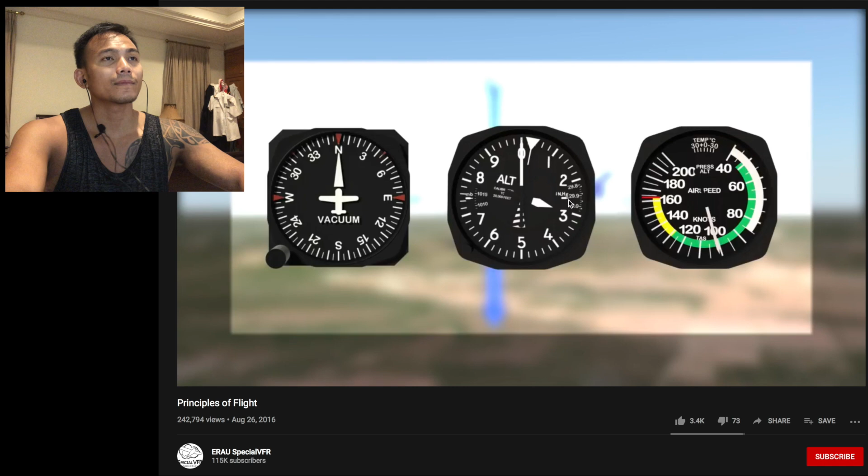When an aircraft is maintaining its heading, altitude, and airspeed, it is said to be in straight and level, unaccelerated flight. Jadi kalau dia maintain ini semua, berarti pesawat tegak lurus ya, straight and level. Terus dia nggak ada akselerasinya, penerbangannya nggak ada akselerasi, jadi dia konstan aja. Dia nggak ada climbing, nggak ada descent. Di 3000 feet di sini headingnya to the north, speednya konstan 100 knots.

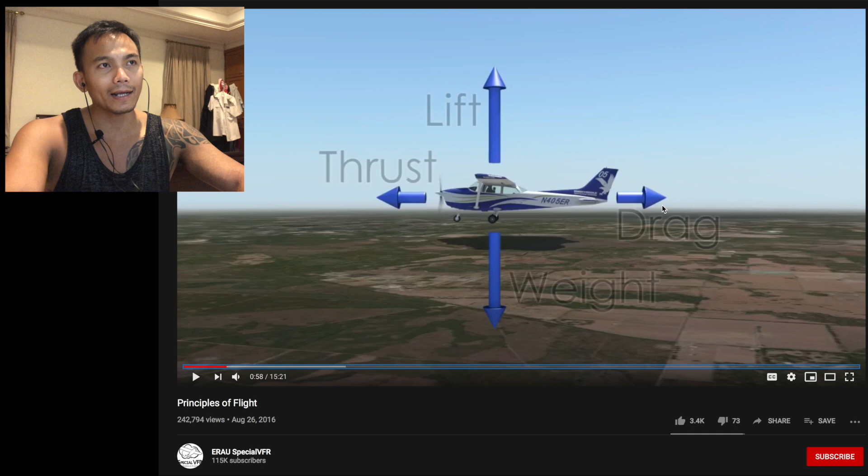In unaccelerated flight, lift equals weight and thrust equals drag. Jadi kalau unaccelerated flight, pesawatnya nggak akselerasi, lift sama dengan weight, thrust sama dengan drag ya. Let's look at these four forces in a little more detail. Nah sekarang bakal dibahas 4 force itu lebih detail.

The key to an aircraft being able to fly is lift. Jadi yang membuat pesawat bisa terbang itu namanya lift ya.

Looking at a cross-section of a wing, we can better understand how the lift gets generated. Nah ini sayap nih, bentuk pesawat sayap kalau dilihat dari samping. Nah sekarang mau dibahas kenapa bisa terjadi lift.

A wing is a type of airfoil. Jadi sayap itu adalah jenis aerofoil. Airfoils in general are just any surface that generates an aerodynamic force. Jadi airfoil itu adalah surface yang menghasilkan dynamic force ya.

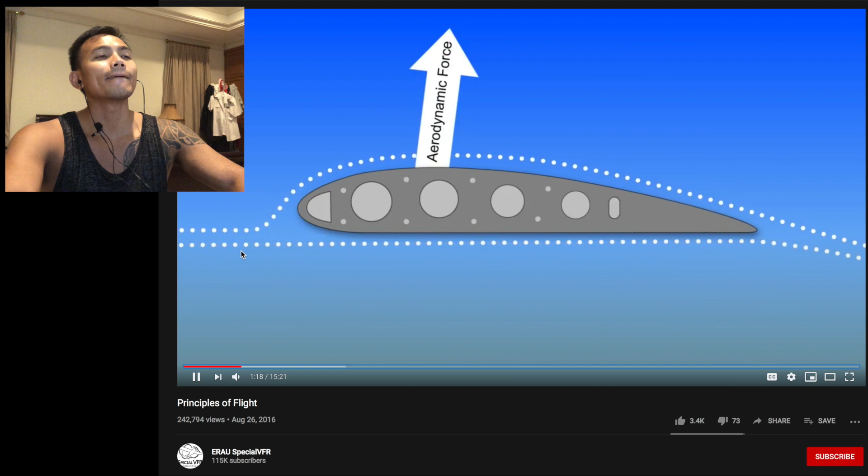That generates an aerodynamic force as a fluid. Yang menghasilkan dynamic force dengan fluid. Fluid ini nih ada, jadi dia ada yang lewat-lewat ini, terjadi dynamic force. In our case, air moves around it. Karena ada udara yang bergerak di sekitarnya, terjadinya aerodynamic force.

Don't confuse a fluid with a liquid. Fluids are any substance that deform under an applied stress. Liquids, gases, and plasmas are all considered fluids. Jadi itu dari fluid ya, dibahas fluid itu apa.

In addition to the wings, all the flight control surfaces, as well as the propeller, are considered airfoils. Nah, jadinya selain sayap, flight controls ini sama propeller ini juga disebut aerofoil. Cuman mereka tidak bisa menghasilkan sebagus sayap pesawat.

The aircraft's fuselage is even an airfoil. Nah, ini fuselage namanya, juga airfoil juga. But it's not very good at producing lift.

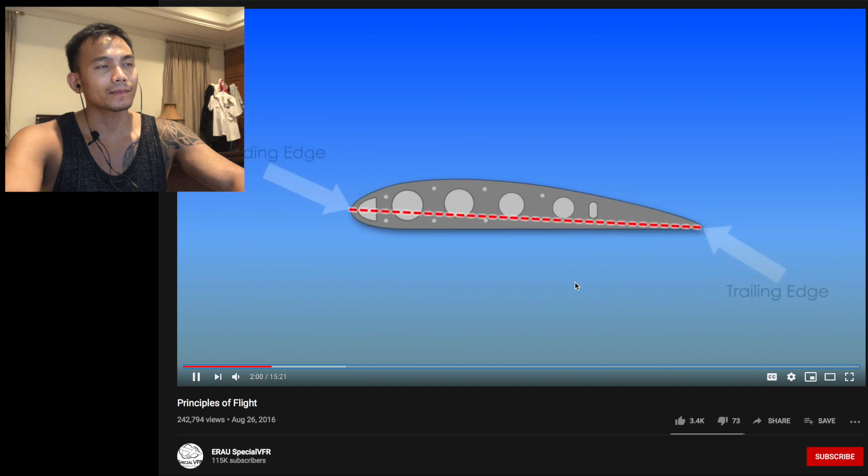Let's introduce a few new terms. The forwardmost point of the wing is called the leading edge, and the aftmost point is called the trailing edge. If we connect these two edges together with an imaginary line, this line is called the chord line. This is a wing, an aerofoil.

As an airplane flies through the air, the path that the plane travels along is known as its flight path. The airflow that flows around the airplane as it travels through the air is known as the relative wind. The relative wind is parallel to, but opposite, the aircraft's flight path.

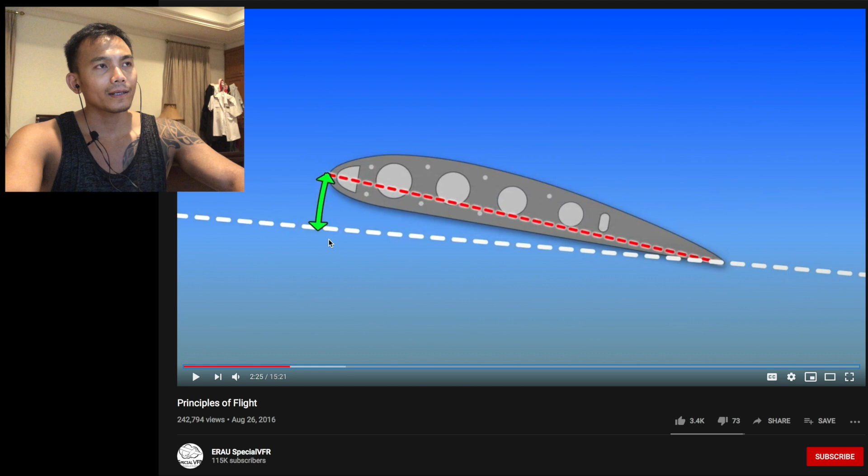The angle between the wing's chord line and the aircraft's relative wind is called the aircraft's angle of attack. The angle of attack is a major factor as to how much lift the wings generate.

So now that we've got those terms out of the way, how does a wing actually create lift? There are two major theories, created by Daniel Bernoulli and Sir Isaac Newton, that explain the creation of lift.

These are Newton's three laws of motion and Bernoulli's principle. These are definitely used when you start flying school, to explain why lift happens.

While all three laws of motion apply to flight: a body at rest remains at rest or in motion until acted upon by an outside force. Force is equal to mass times acceleration. For every action there is an equal and opposite reaction.

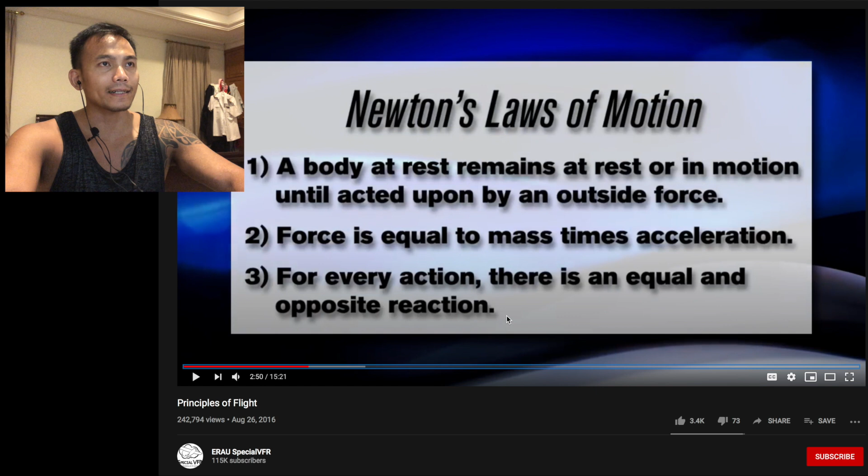The third law has the most significance to lift production. Newton's third law states that for every action, there is an equal and opposite reaction.

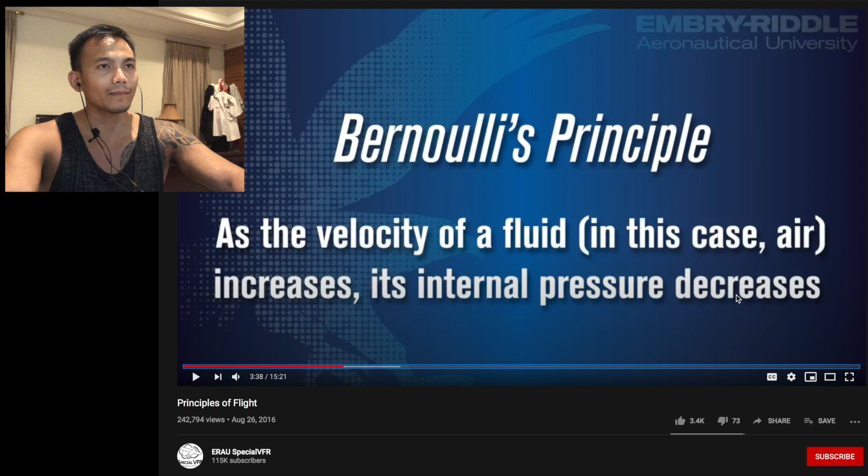We can visualize this by having air flow through a tube with a narrower middle section, which we call a venturi. Jadi ini cerita ada udara yang masuk ke tabung yang dalamnya lebih sempit, kayak venturi gitu.

As air enters the tube, it is traveling at a known velocity and pressure. Jadi di sini velocity dan pressure-nya sama aja.

When it arrives at the narrower portion, the velocity increases to allow the air through. Jadi kecepatannya meningkat supaya udaranya lewat. As the air's velocity increases, the air's pressure decreases, jadi tekanannya turun.

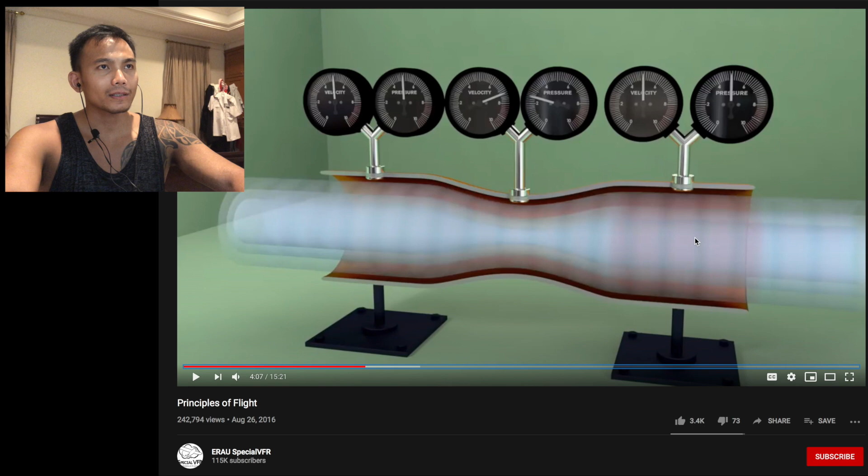Then, as the air exits the narrower portion, it returns back to its original velocity and pressure. Jadi pas keluar, mereka sama lagi, normal: masuk sini velocity naik, tekanan udara turun, keluar sini normal lagi dua-duanya.

Now, let's flatten the top part of the tube. Sekarang atasnya diratain, bawahnya masih kayak begini. Granted, the effect will not be as pronounced, but there will still be a change in velocity and pressure as the air moves through.

Now, how does this relate to a wing? Ini kita coba menyambungkan kenapa ini bisa nyambung sama sayap pesawat. Well, if we replace the bottom protrusion of the tube with a wing, in essence we have the same thing as a venturi. Jadi sama aja sama venturi yang tadi.

As the air passes over the wing, each layer of air gets deflected less and less until finally we reach a layer where the air is not disturbed at all from the wing. Jadi dia makin ke atas, makin berkurang, sampai udaranya tidak keganggu. Yang di bawah ini keganggu, makin ke atas ini biasa aja. This can be thought of as the top of the venturi.

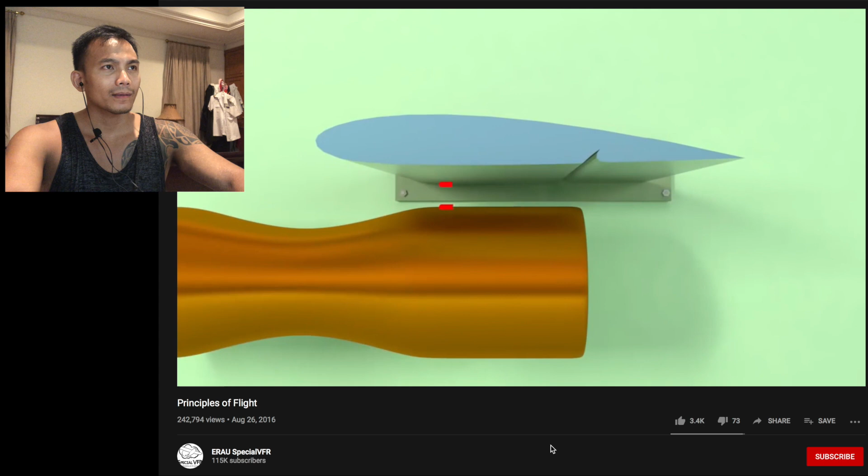An airplane's wing is shaped similar to that of a venturi. The top is rounded while the bottom is relatively flat. Jadi yang atasnya bentuknya begini, bawahnya flat, seperti tadi.

Because of this, the air traveling over the wing will increase in speed. Jadinya yang di atas ini udaranya lebih cepat, lebih cepat travelnya daripada yang di bawah.

Dia harus cepat karena dia lebih jauh, dan harus ketemu di titik ini. Udara yang ini kan kebagi dua, yang di sini sama di sini, ngelewatin ini harus ketemu di sini. Gimana caranya supaya udara yang tadi ke sininya ketemu? Mereka harus lebih cepat supaya ketemu di sini. Paham nggak? Nggak paham ya.

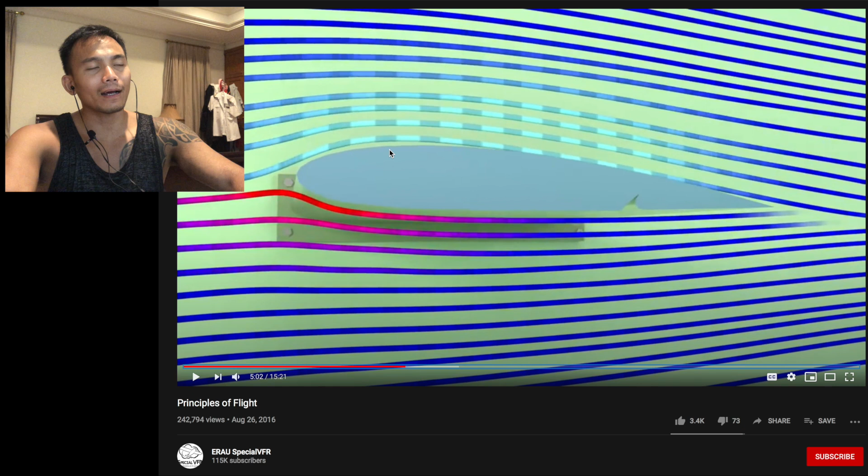And as a result, we'll have a lower pressure than the air below the wing. Jadi di atas pressure-nya, tekanan udaranya, lebih rendah dari yang di bawah. Seperti tadi, velocity naik, tekanannya menurun.

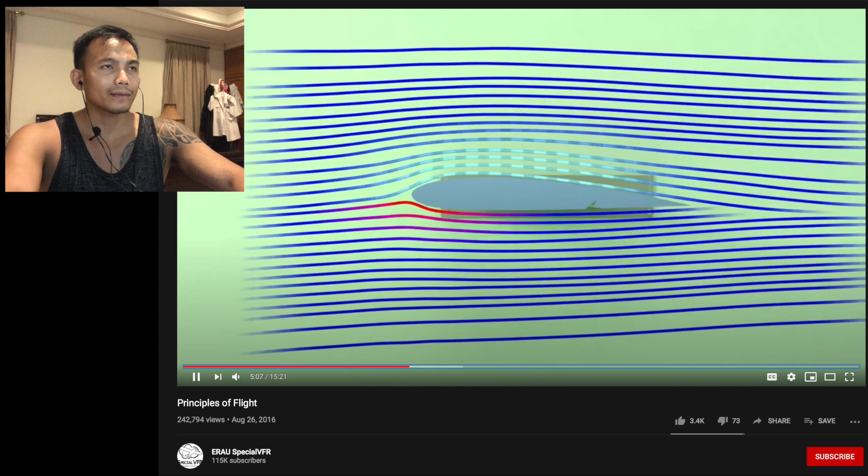This imbalance in pressure is called a pressure gradient. Tekanan yang nggak seimbang ini namanya pressure gradient. Wings are designed to create this kind of pressure gradient, karena sayap menciptakan ini, because air always moves from areas of high pressure to areas of low pressure. Jadi dari high pressure ke low pressure.

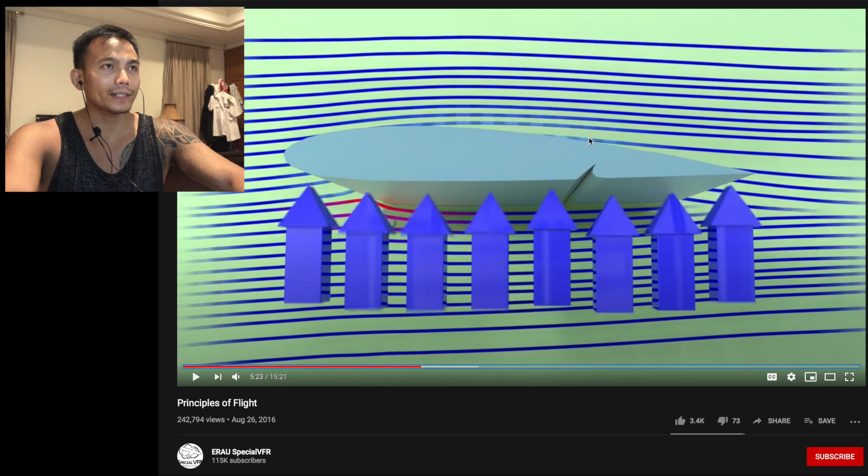Since the wing is stuck in between the two areas of unequal pressure, it is lifted towards the area of low pressure by the force of the higher pressure air trying to move to the low pressure side of the wing. Jadi terjadinya lift, high pressure mau bergerak ke low pressure, makanya terjadi lift.

Now that we've covered the two theories behind lift, let's discuss all the factors that determine how much lift is produced. The best way to discuss this is through the lift equation. Jadi sekarang kita bahas seberapa banyak lift bisa dihasilkan melalui lift equation, formulanya lift.

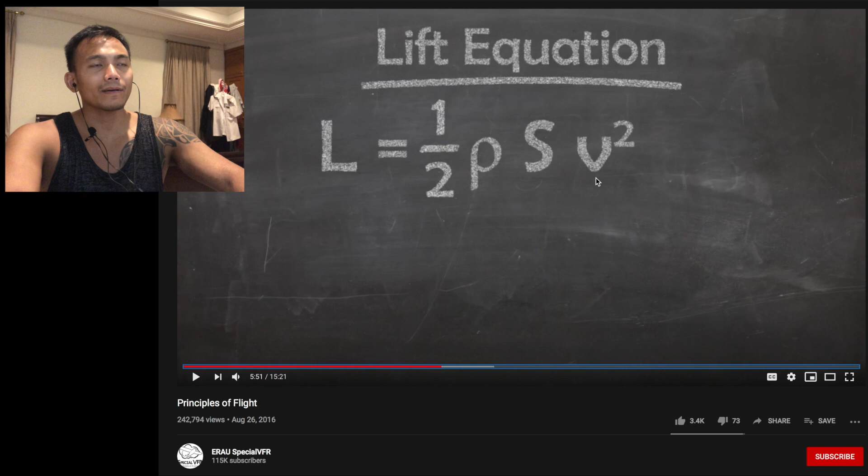Don't worry though, this isn't a math lesson. Lift equals one half times the air density, jadi lift sama dengan setengah air density, times the surface area of the wing, seberapa lebar sayap pesawat, times the airplane's velocity squared, dikali kecepatan pesawat kuadrat, times the coefficient of lift, dikali coefficient of lift. For the most part, this should be fairly straightforward.

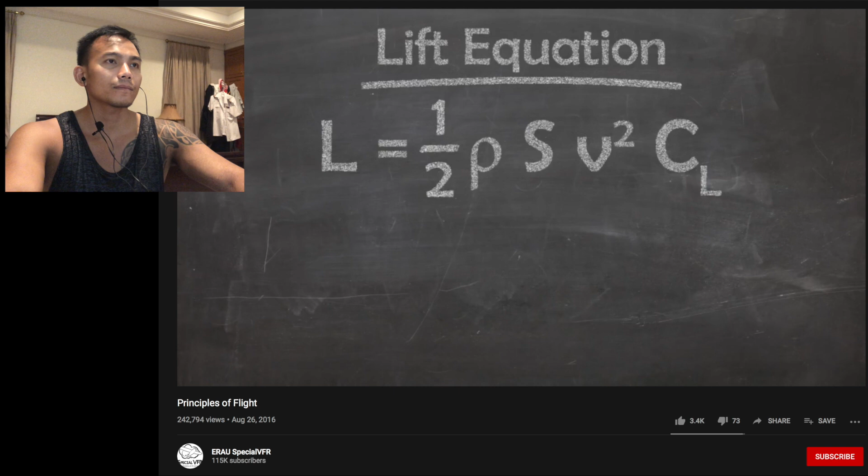The coefficient of lift is simply a number associated with a particular shape of an airfoil, as well as the airfoil's angle of attack. It's about how the wing is shaped - curved or straight - and its angle of attack.

Generally, there are only two ways a pilot can control the amount of lift the wings generate: airspeed or angle of attack. Airspeed comes from power/thrust, while angle of attack comes from the flight controls. The faster the airplane travels, the more lift the wings generate. Similarly, the higher the angle of attack, the more lift is generated. However, there's a limit - if the angle of attack gets too high, the airplane stalls and loses lift.

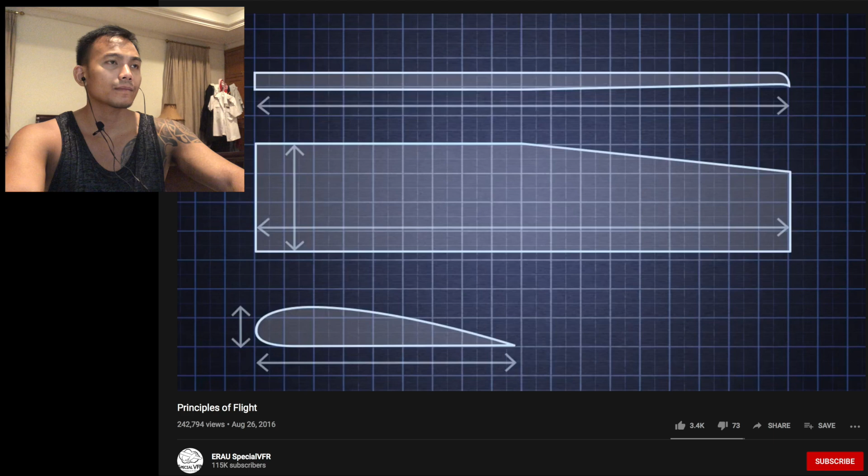More information on stalls will be covered in a future lesson. In addition to airspeed and angle of attack, there are other factors affecting lift that the pilot does not control. These factors relate to the wing's design itself: the wing's planform, camber, aspect ratio, and wing area - these are built into the aircraft by the manufacturer, unlike flight controls and power which the pilot can adjust.

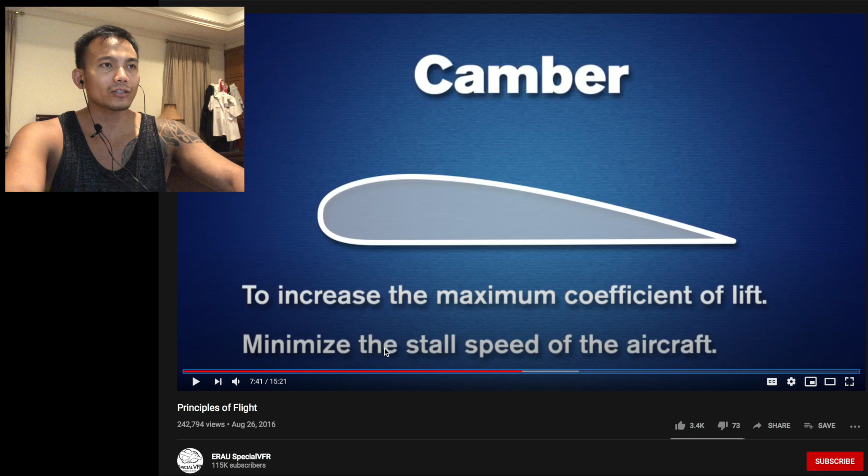The wing's aspect ratio is the relationship between the length and width of the wing. Generally, the higher the aspect ratio, the more efficient the generation of lift. For example, gliders have really long, skinny wings, giving them a higher aspect ratio compared to something like a Cessna 172, to help them glide better.

Finally, there is the wing area, which is simply the total surface area of the wing. The larger the wing area, the more lift the wing can produce.

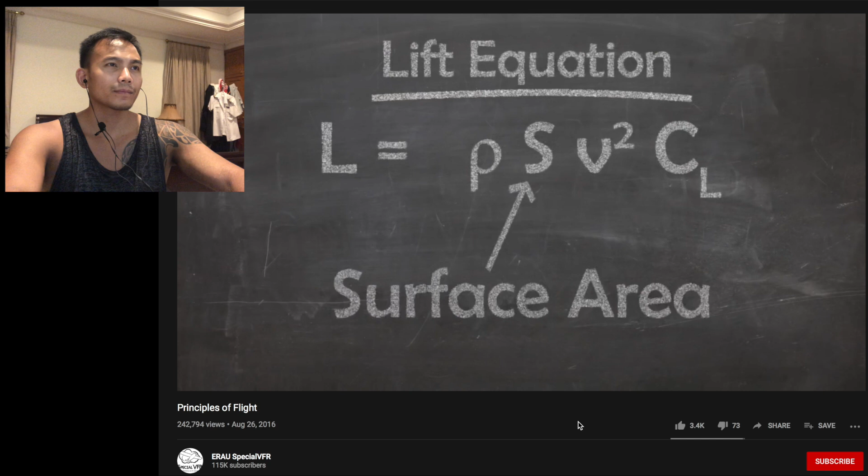The larger the wing area, the more lift the wing can produce. Looking back at the lift equation, we can see that the wing area is incorporated into the equation—wing area is the same as surface area, S.

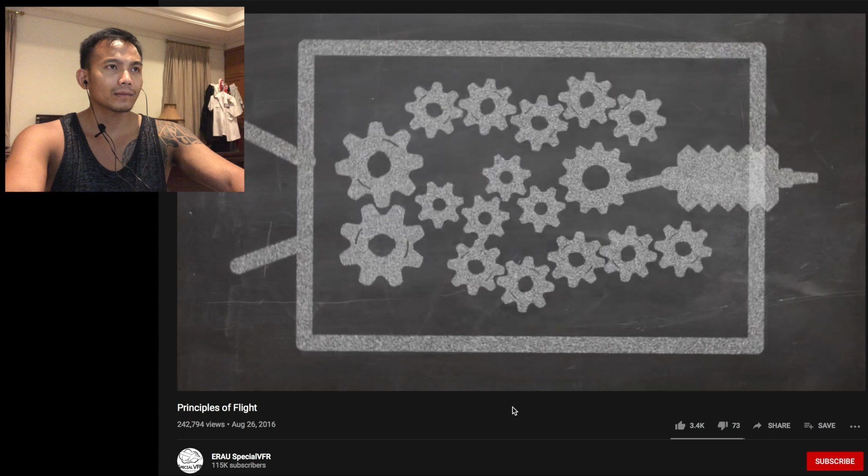The rest of the wing shape factors are merged into the coefficient of lift variable.

Bagus juga ya videonya guys, dijelasin lebih detail how pilots can control the lift generated by the wings by changing the aircraft's airspeed and angle of attack.

However, most airplanes come equipped with one or more additional ways for the pilot to manipulate the wings, essentially changing the shape of the wings—pilot ngontrolnya dari bentuk sayap pesawat, seperti ngeluarin flap di sini. Jadi dimanipulasi bentuk sayapnya, these are called high lift devices, seperti flaps ini, dia menghasilkan more lift karena surface wing area-nya jadi lebih lebar.

Most common of which are trailing edge flaps, or just flaps for short. High lift devices, such as flaps, are designed to increase lift and drag generated by the wings at low airspeeds—buat landing, supaya speednya lebih rendah, bisa juga buat short field takeoff.

Flaps are particularly important for the approach and landing phases of flight. Use of flaps during landing allows the pilot to fly at a fairly steep descent angle—jadi landingnya lebih curam, dengan airspeed yang lebih rendah, jadi pesawatnya lebih gampang dikontrol, without gaining airspeed, and allows the airplane to touch down at a much slower airspeed.

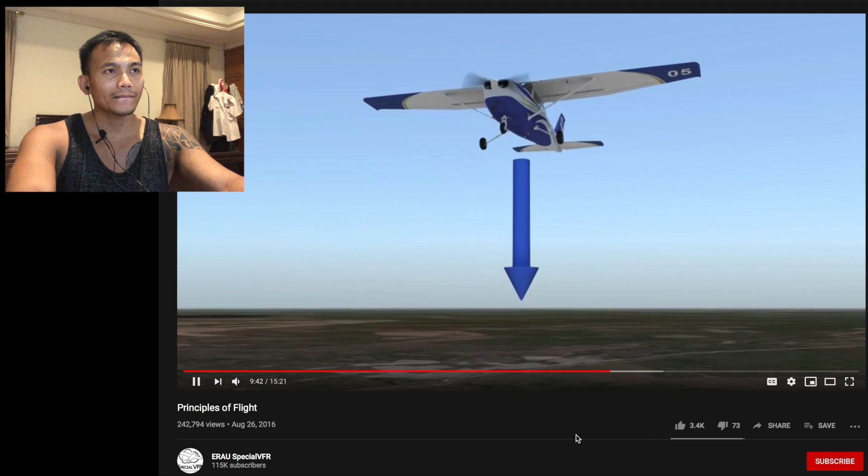Starting with weight. Weight is the force of gravity, pulling the aircraft back down to the earth—dia yang membawa pesawat kembali ke bumi. This force always acts vertically downward to the center of the earth, aksinya langsung ke bawah. No matter what the aircraft's attitude, the weight force always extends and pivots from the center of gravity, dan dia selalu bereaksi di center of gravity pesawat ini, bukan di sini, tapi di tengah-tengah.

Also known as its CG—biasanya center of gravity itu kita sebut CG. Keep in mind that the weight of an aircraft is not constant, it will vary with the equipment that is installed—jadi berat pesawat nggak selalu sama, tergantung kita taruh barangnya di mana, center of gravity bisa di belakang atau di depan, makanya di tengah itu paling bagus biar balance, terbangnya lebih enak.

As well as the passengers, cargo, and fuel—tergantung passenger, cargo, sama fuel center of gravity itu. Throughout the flight, the weight will slowly be decreasing as fuel is burned to power the engine, jadi weight itu berkurang karena fuelnya berkurang kalau kita terbang.

Next is thrust—sekarang kita bahas thrust. Thrust is the forward acting force—itu dia forward acting force, force yang membawa kita ke depan.

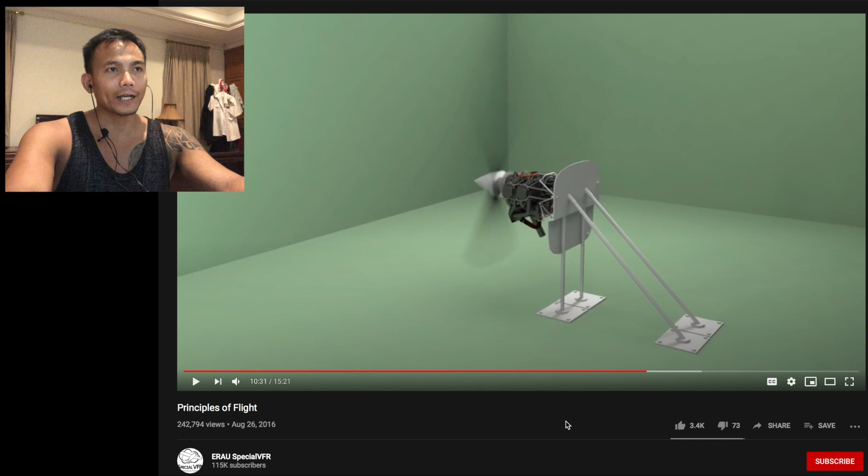Similar to lift, thrust is generated from the same principles as lift, but in a horizontal direction. A propeller is an airfoil. As such, as it rotates, its blades accelerate the surrounding air towards the aft end of the aircraft.

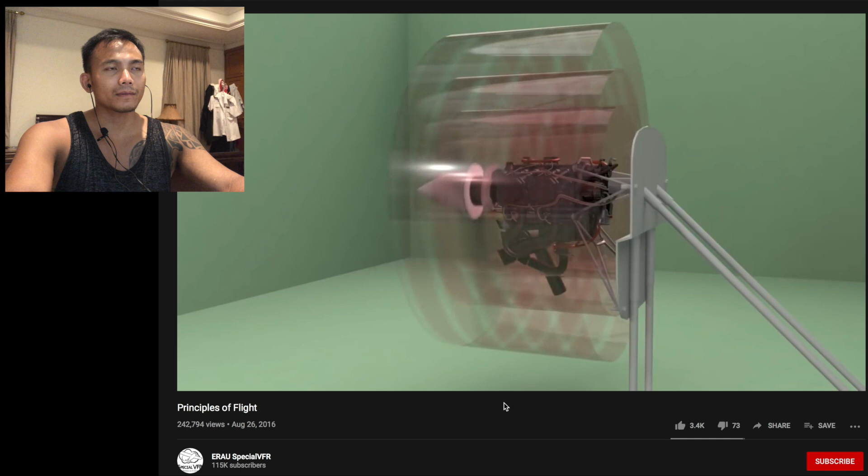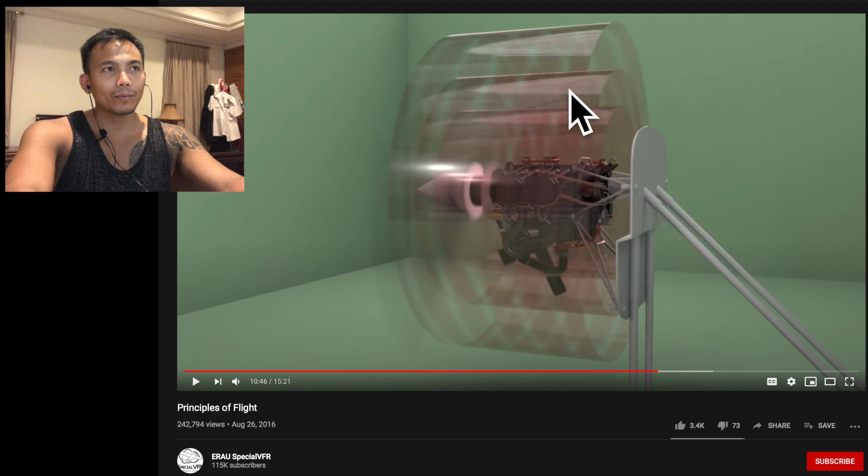Jadinya propeller itu kayak sayapnya aerofoil tadi, cuma dia muter, terus dia bikin force, perputaran ke belakang, jadinya terjadinya thrust. As blades accelerate the surrounding air towards the aft end of the aircraft, dia ke belakang gitu perputarannya, nyiptain thrust itu.

And as illustrated with Newton's third law, the equal and opposite reaction results in the aircraft moving forward. Jadi ada aksi ada reaksi ya, jadi dia bikin pesawat ke depan.

Finally, we reach our last force, drag. Yang terakhir nih drag. Drag is the force opposing thrust, dia yang melawan thrust ini, opposing thrust, which limits the forward speed of an aircraft. Dia yang ngelimit pergerakan pesawat ke depan, karena drag itu.

Drag is the force opposing thrust, which limits the forward speed of an aircraft. There are two types of drag, ada dua tipe: parasite and induced, ada parasite drag, ada induced drag.

Parasite drag is a direct result of the air resistance as the airplane flies through the air. Parasite drag itu drag yang terjadi pas kita terbang ke depan, itu parasite drag.

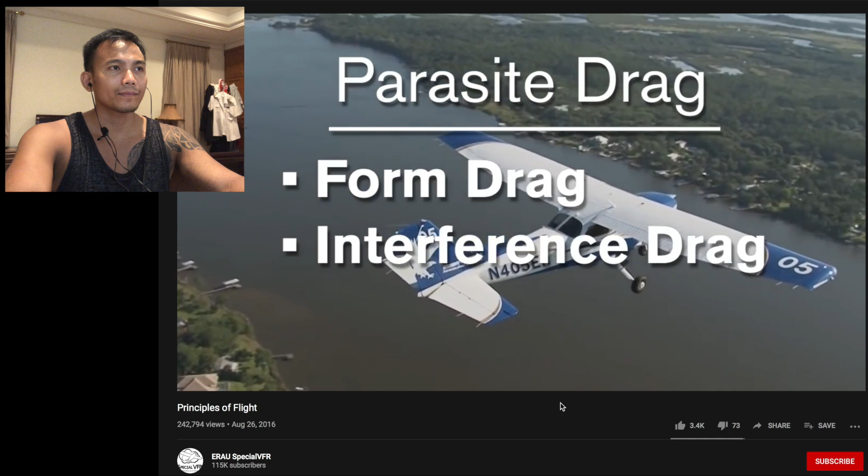There are three types of parasite drag: form drag, interference drag, and skin friction drag. Parasite drag dibagi 3 lagi: form drag, interference drag, sama skin friction drag. To learn about these three types, check out the bonus video on parasite drag - itu dibahas di video yang lain guys, nggak di sini.

The amount of parasite drag varies with the speed of the aircraft. Jadi jumlah parasite drag itu tergantung sama kecepatan pesawat. As the airplane's speed increases, the amount of parasite drag will increase. Jadinya kecepatan pesawat naik, parasite dragnya naik.

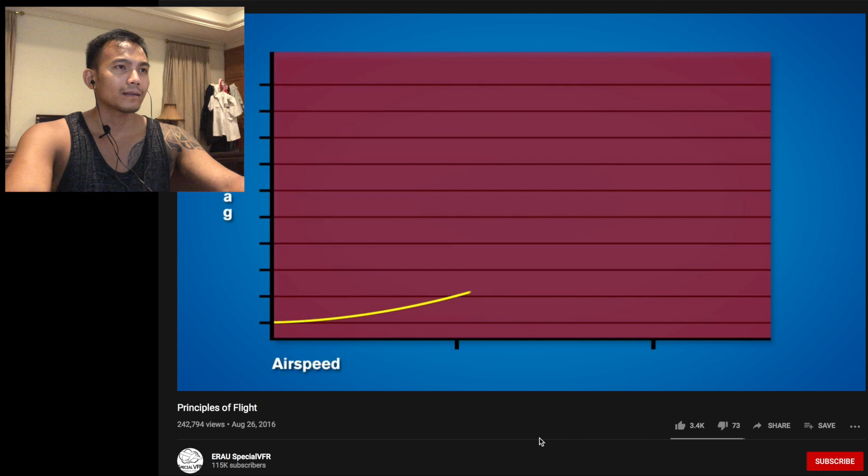In fact, the amount of parasite drag you experience is directly proportional to the square of the airspeed. Jadi airspeednya naik, parasite dragnya juga naik, mereka sama barengan. For example, an aircraft traveling at 120 knots will experience 4 times as much parasite drag as the same plane going 60 knots. Jadinya 120 knots, parasite dragnya 4 kali lebih banyak dari 60 knots. Padahal speednya kali 2 doang, tapi dragnya dikali 4.

The same altitude. The other kind of drag is lift-induced drag, sekarang yang kedua, lift-induced drag, more commonly called induced drag.

While the wing is creating lift, behind the wing is a downwash of air. Jadinya pas dia bikin lift, ada udara yang ke bawah, downwash. At the same time, the airflow around the wingtips are creating vortices - ini juga bikin vortices, spiral from below the wing to above the wing, dia spiral gitu, muter ke atas.

As these vortices wrap around the wing, they actually change the downwash angle of the air flowing over the wing - dia ganti airflow-nya ke bawah gini. This, in effect, tilts the direction of the lift created backwards. Makanya dari ke atas liftnya jadi ke belakang sini.

This shift from completely vertical lift to slightly aft lift is due to induced drag. Ini terjadi karena induced drag nih dari yang ke atas sampai ke belakang gini. Completely vertical lift to slightly aft lift is due to induced drag.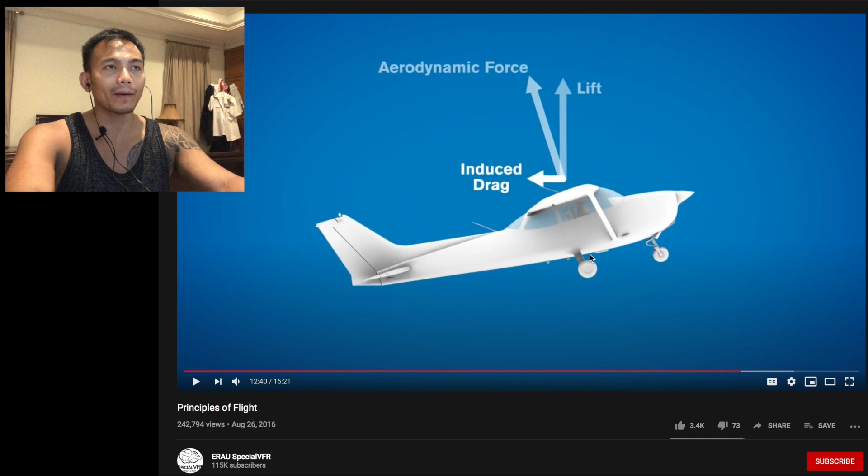This is because induced drag is worse when the airplane is flying at a high angle of attack. Jadi induced drag itu bakal lebih banyak kalau kita naikin angle of attack. Lihat tuh aerodynamic force, induced drag-nya naik, karena dia terjadinya kalau airspeed-nya pelan. Karena kalau kita naik angle of attack, otomatis airspeed kita bakal pelan walaupun kita udah full power, apalagi pesawat Cessna itu - like when we are flying slowly.

One way that a pilot can experience reduced induced drag is by flying in ground effect. When flying within a wingspan of the ground, it changes the downwash of the air flowing over the wings. This shifts the lift vector forward and reduces the amount of induced drag, so when landing, induced drag is reduced because of ground effect.

If we take both induced and parasite drag, plot them on a graph, and add them together, we get a new curve representing total drag. Here's the curve: induced drag, parasite drag, and total drag. The lowest point on the total drag curve shows the airspeed at which we make the most amount of lift and the least amount of drag, giving us the smallest drag for the best airspeed.

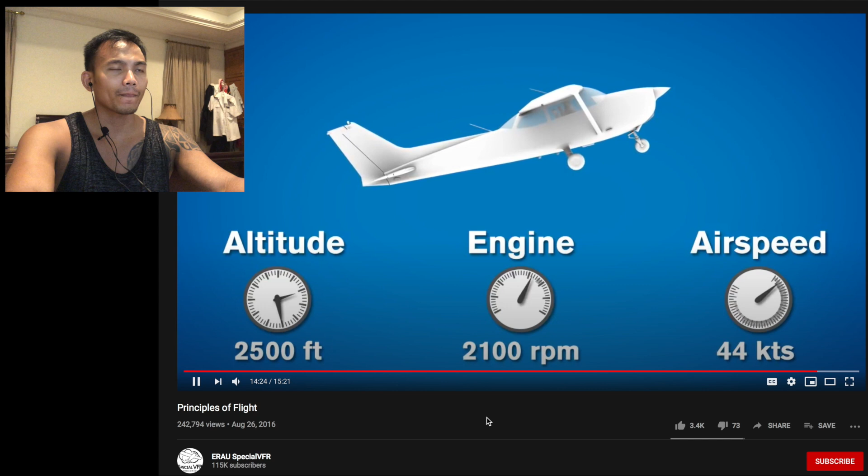As such, any input you make on the flight controls will not have the fast response one would be used to. The flight controls will feel mushy, like a slow reaction, and they may require large inputs before any real response is felt.

While the finer details of the principles of flight can seem a bit overwhelming at first, gaining a basic knowledge of how the airplane flies provides the pilot full understanding of all the forces at work and the best methods and techniques for controlling their aircraft. A good pilot doesn't just drive their plane from point A to B, but instead understands the art and science of how their plane flies, the basic knowledge of why the airplane flies.